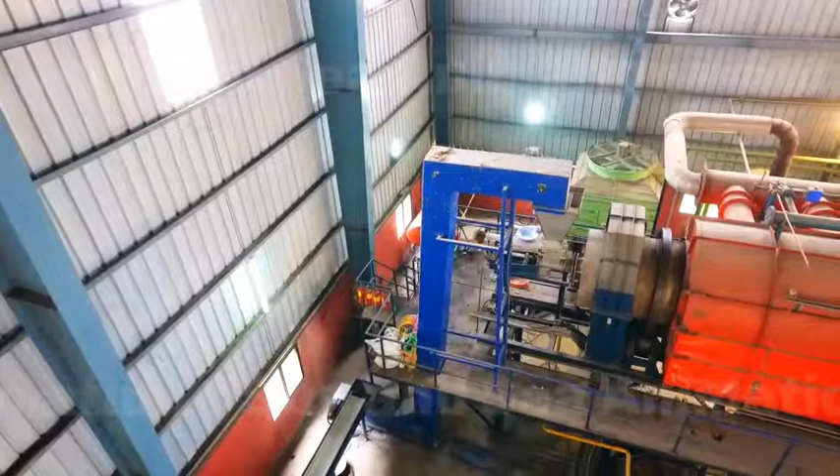KGE has built a state-of-the-art plant at Baikampadi in Mangalore, where plastic waste is converted into fuel on an industrial scale through the process of pyrolysis. Let's see how this works.

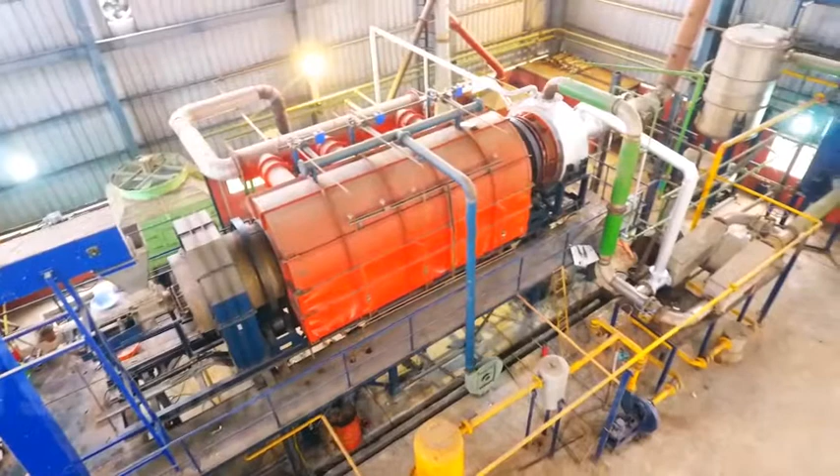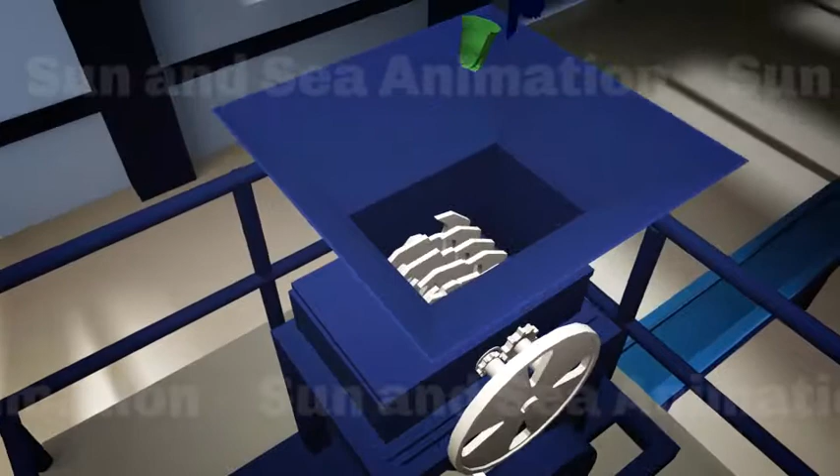Production process. End-of-life plastics of various types like polythene covers, polypropylene chips, food containers, etc. of various shapes and sizes are fed into the shredder. This operation is done manually. These shredded plastic pieces are conveyed to the loading hopper through a horizontal conveyor followed by a Z conveyor.

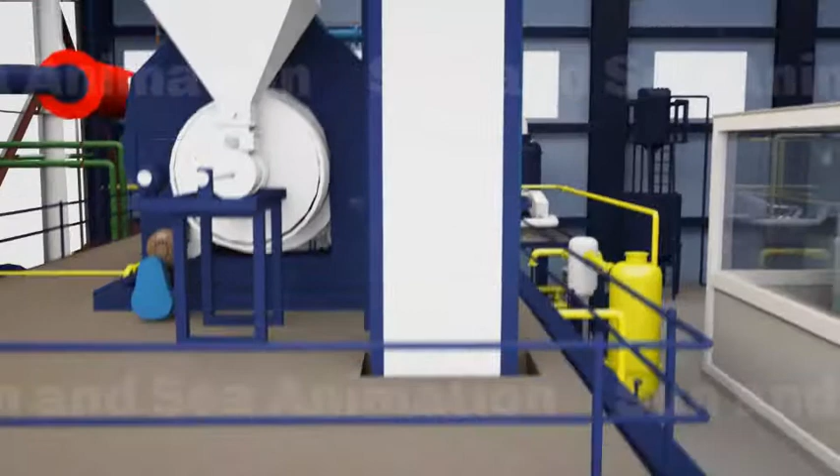A suitable quantity of proprietary and patented catalyst is added to the shredded plastic in the hopper. This mixture of shredded plastic and catalyst enters a rotary kiln pyrolysis reactor made up of SS304 material with the help of a screw feeder. An average loading rate of 300 to 400 kilograms of plastic can be achieved per hour once equilibrium is achieved.

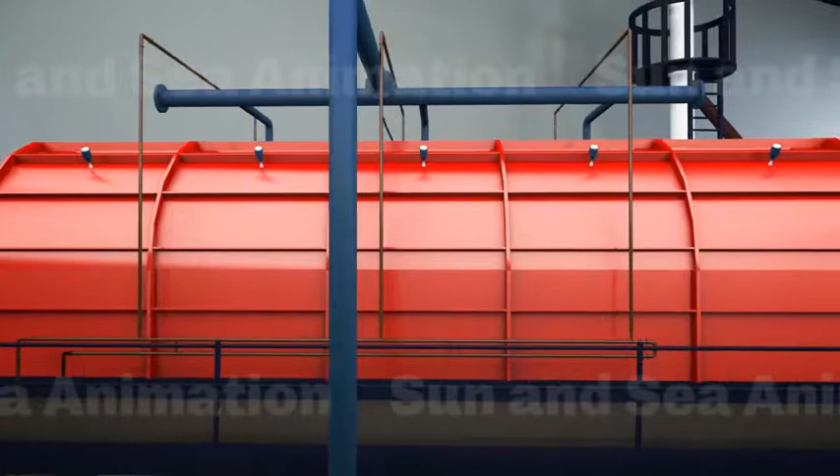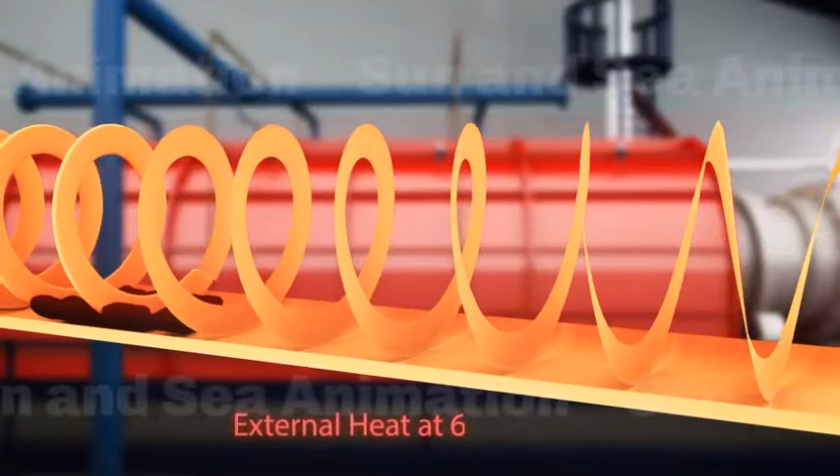The pyrolysis reactor, having a spiral inside to push the material to the other end when rotated, is heated externally to a temperature of 600 degrees Celsius with the help of 3 dual fuel burners kept at equal distances.

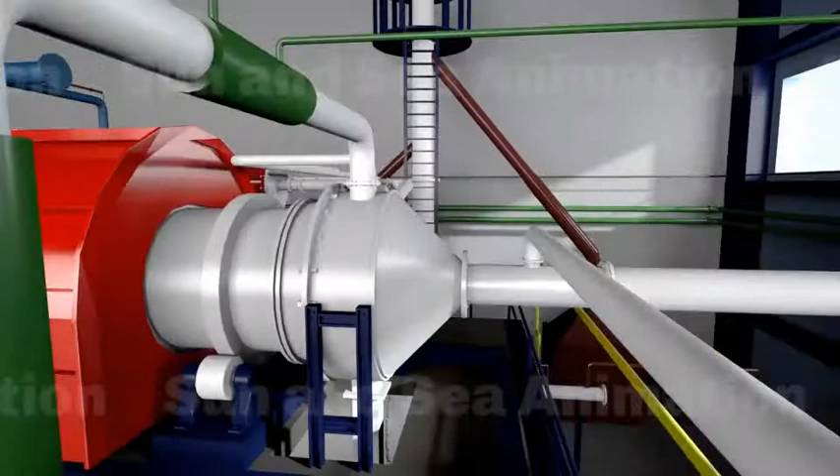These operate on pyrolysis oil as well as uncondensed pyrogas. When subjected to intense heating in the presence of the catalyst in this oxygen-free environment, the long chains of hydrocarbons in the plastics start disintegrating and form small hydrocarbon chains of C1 to C16. This process is called thermocatalytic depolymerization of plastics, or in general words, plastic pyrolysis.

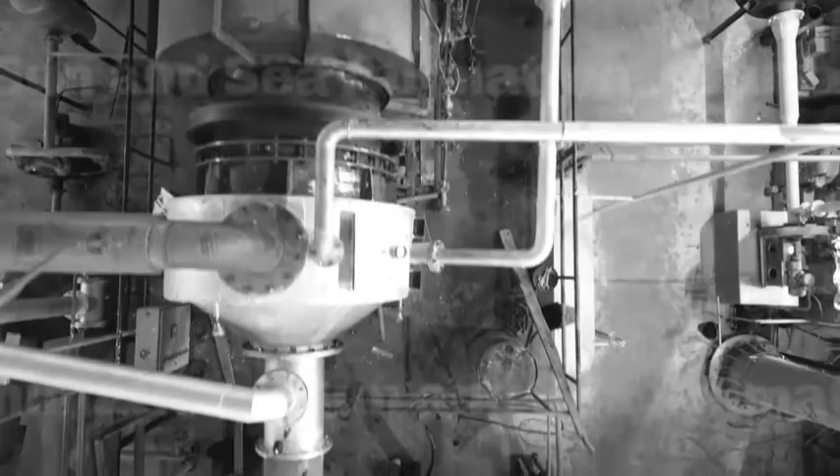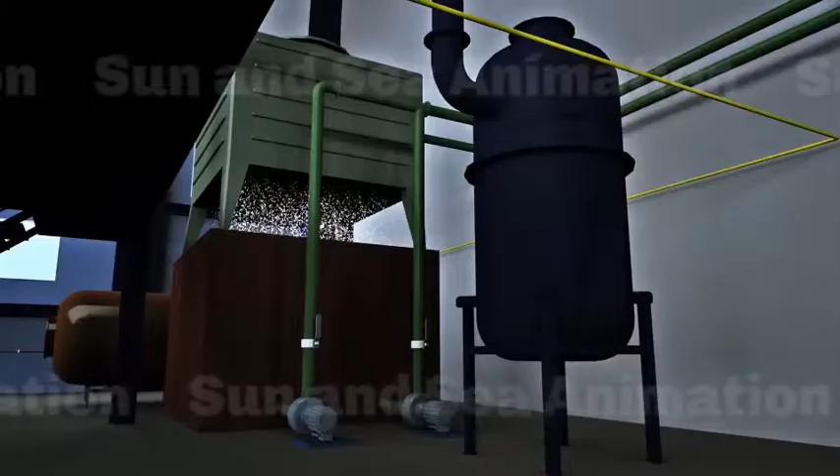The non-hydrocarbon inorganic components in the plastics like fillers, external dirt, metals, etc. remain in the reactor as pyro ash, and the same is pushed out into the carbon ash discharge chute. The small hydrocarbon chains generated in the reactor, which are in the form of high-temperature condensable vapors, enter the condensation section of the plant. Cooling water coming from cooling towers helps to cool and condense the hydrocarbon vapors in the condensers, and as a result, C5 to C16 fractions become liquid and are collected in the receiver tanks.

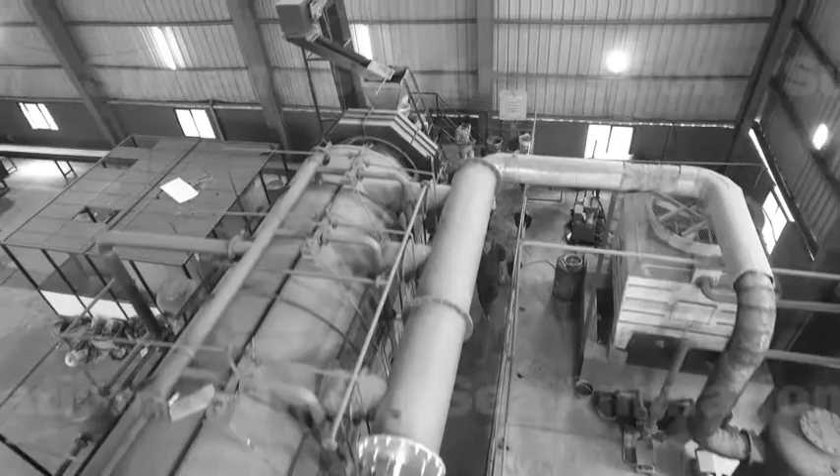There will be a few hydrocarbon chains having C1 to C4 fractions, which will escape the condensation process and come out as pyrogas. These gases are now used as an alternate fuel for the burners in the place of expensive liquid fuel used to externally heat the reactor. If the pyrogas generated is more than what is required to heat the reactor, the excess gas is sent to a flaring chamber where it is flared up.

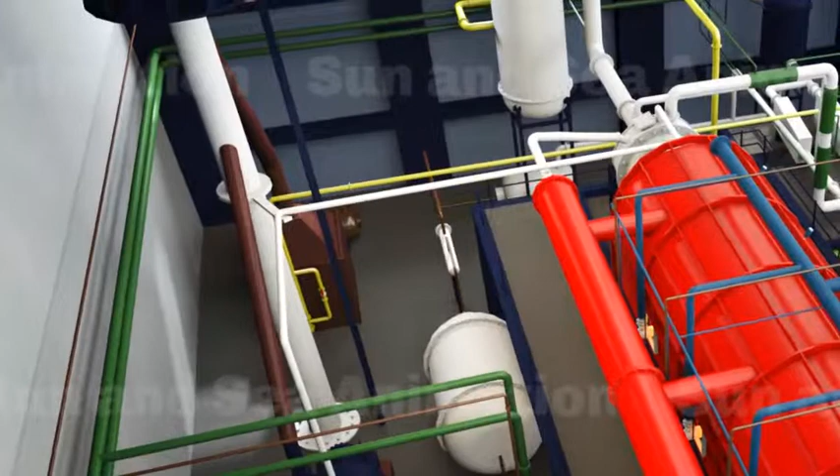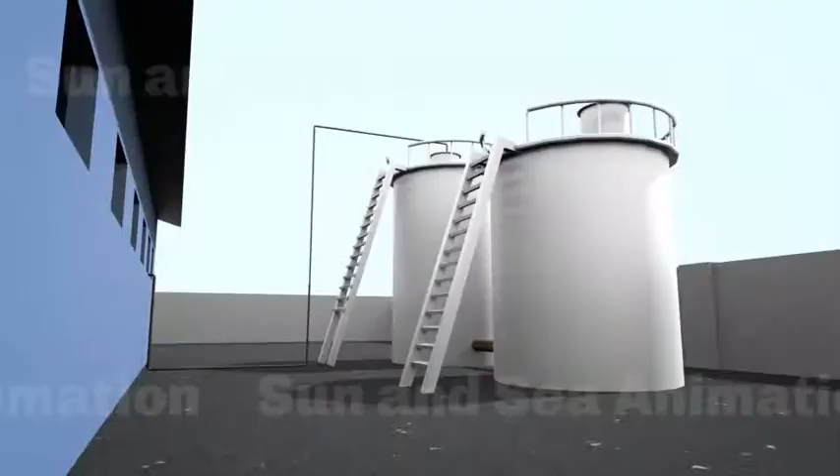The flue gas generated in the furnace is sucked out with the help of an exhaust ID fan through a scrubber to remove impurities and particulate matter in order to meet PCB norms, and then it is let out through a 40-feet chimney. The liquid fuel collected in the receiver tank is pumped through oil filters and sent to the storage tank kept outside the factory shed. The ash discharged from the reactor is cooled and conveyed to the storage bin.

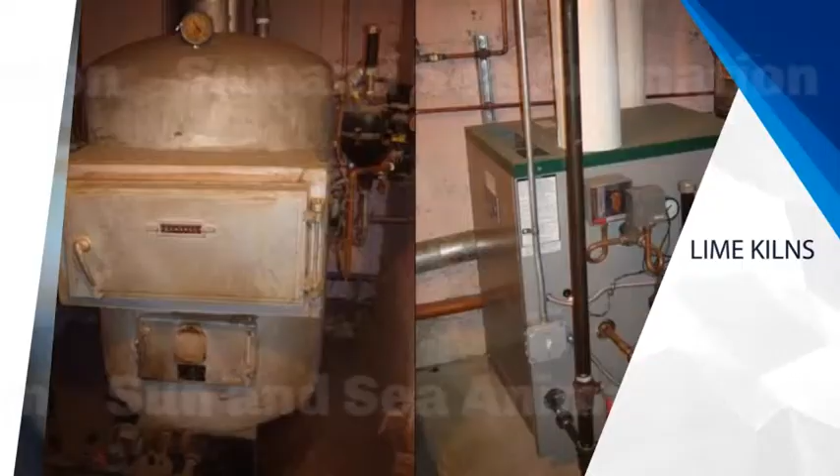Applications. This oil created from waste plastics can be used in almost all thermal applications such as boilers, furnaces, hot air generators, cement kilns, lime kilns, and any other application where liquid fossil fuels such as HSD, light diesel oil, or furnace oil are normally used. With advanced distillation techniques, this fuel can be converted into Euro standard gasoline, diesel, and jet fuel.

The carbon generated in the final stage of the pyrolysis process can be used in foundries, paper and pulp industries, cement plants, and thermal power plants. KGE is now successfully marketing this fuel in the city of Bangalore. It is being sold to corporate clients like hotels and hospitals who take pride in replacing fossil fuels like HSD with this green fuel for their steam boilers.

KGE is a division of the Dubai-based Kalandur Group. This group was established by Mr. Kalandur in the year 2000 and has operations in India and the GCC countries. The group has been providing high-quality solutions in the diverse fields of construction, interior fit-out, furniture manufacturing, retailing, general trading, and green energy solutions.

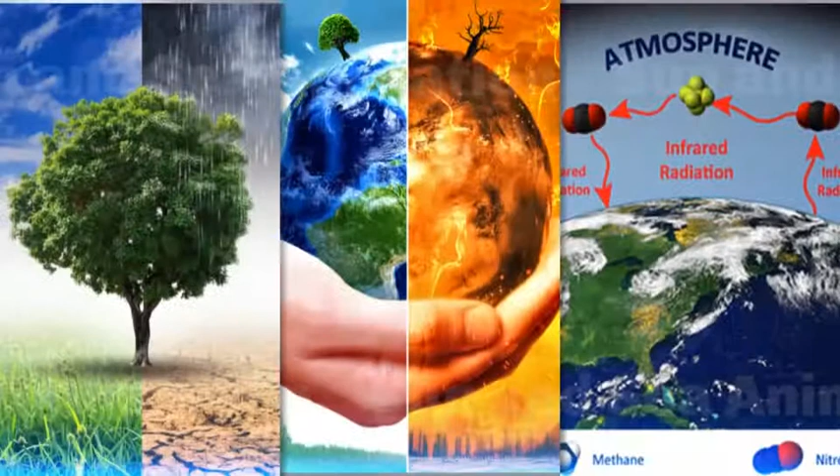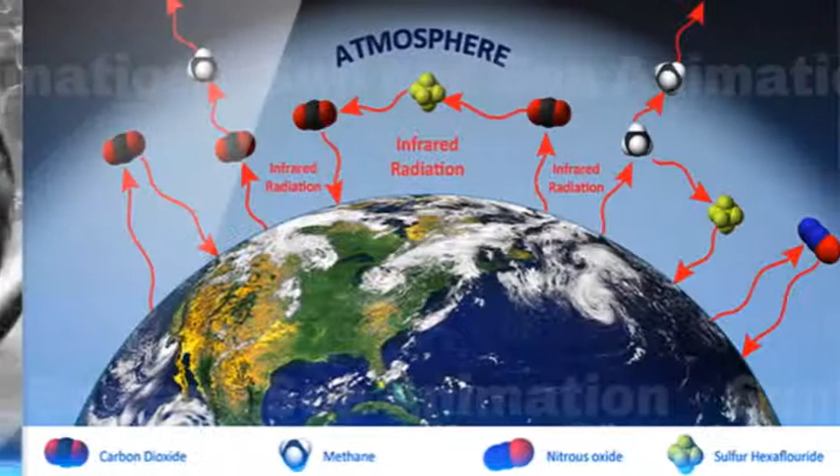Conclusion. In a world that is increasingly bearing the brunt of global warming and climate changes triggered by the ecological imbalances caused by human greed and excesses, finding sustainable solutions is no more a matter of choice. That is, if we are serious about our survival on this planet. It is with this clear realization that KGE has chosen to join the worldwide campaign to resolve the problem of waste plastic pollution and in the process reduce our nation's dependence on fossil fuels by converting waste plastics into fuel.